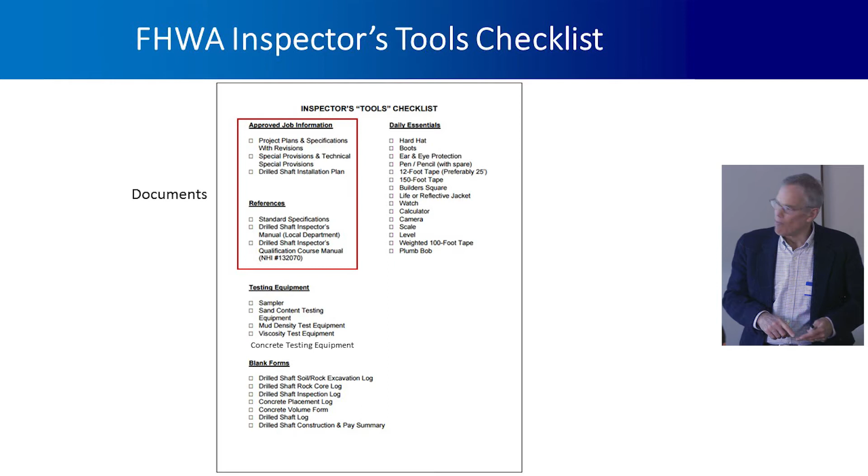So let's talk a little bit about some of those. So this would include all the information relevant to that project. So the documents, a lot that we've identified previously, right? So the specifications, the plan drawings that are relevant to the foundations, the installation plan. I think we probably already beat that horse quite a bit, but the geotechnical report, something, whether it's the plans or that report with the boring logs.

Some other things that are good to have, the notes from this class, and I think we're going to provide PDF copies of all these slides, and that could be a reference for you. Any other applicable MnDOT standard specs, like for the concrete. Any testing that is going to be done out there, for example, the concrete testing, what are the applicable ASTM or other standards.

That little green ADSC drilled shaft inspector's manual is a really handy thing to have. I've seen a copy around here. You should probably take a look at that. And then those of you that have taken that NHI course, you might share some of that information with your colleagues.

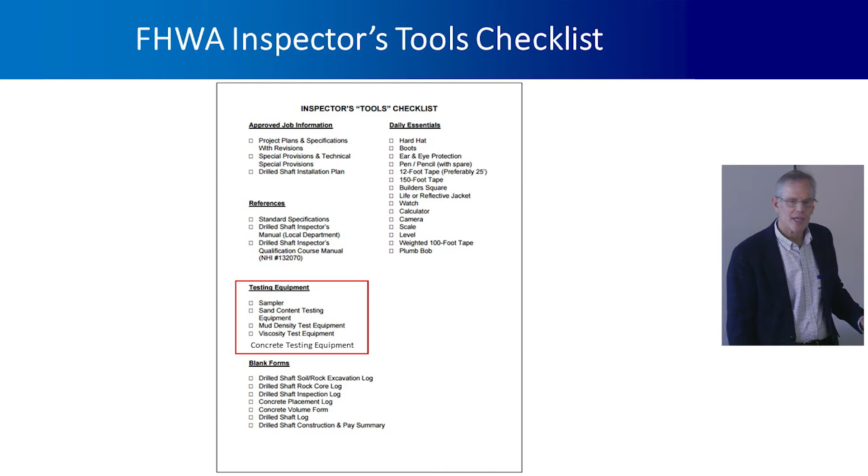And so another category here would be some of the testing equipment. And I am not clear whether the inspectors would be responsible for any of the slurry testing on this job, but from what I heard, maybe that's the contractor's responsibility. But even in that case, just as background, you probably ought to be familiar with what they're doing.

The drilling fluid, the polymer slurry, you saw earlier there's a set of specifications that go with that, and some of the properties that are important to its performance and which are governed by the specification are things like the viscosity of the fluid, and the test that you would see conducted in the field is called the Marsh funnel viscosity test. Pretty straightforward. It's not really the viscosity, it's an indicator of the viscosity. There's a funnel, and it has marks on the inside, one at the top, one at the bottom. The volume of slurry between those two marks is 1 quart.

And so the person running the test uses a stopwatch to time how long it takes for the slurry in the funnel to drop from the top mark to the lower one. That's 1 quart. And that time in seconds is what we call the Marsh funnel viscosity. So the spec for the polymer slurry might be 40 to 60 seconds or something like that. And it might be also specific to that particular product. That's something the manufacturer will specify.

And then the density or the unit weight, they just measure that on a mud balance like that. You fill a certain volume of that container right there, and then you balance it and read off in pounds per cubic foot what the density is, and that has to be within a specified range. Then the sand content test, you're basically by weight determining what percentage of sand, and anything coarser than that. There's a little sieve screen inside there that retains, I think it's the number 200 or coarser, so you can determine the percentage sand.

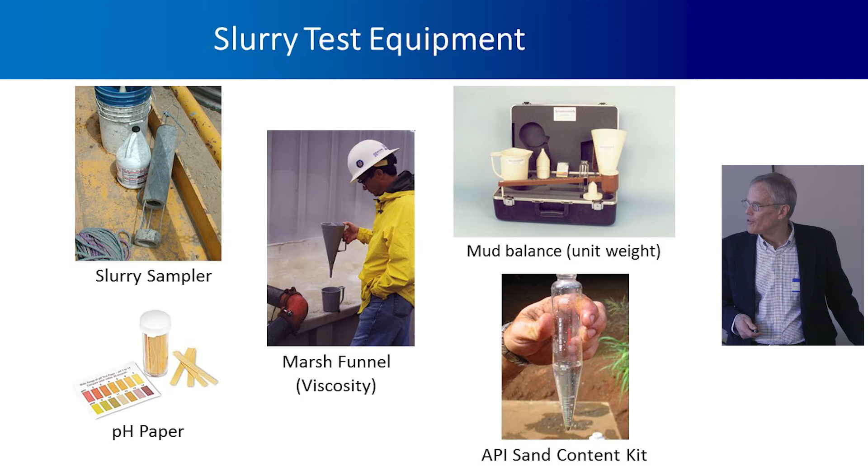And then also the pH. If that polymer slurry becomes too acidic or too basic, it's not going to perform the way that it's supposed to. So we use pH strips to do that. And then, probably a lot of you do this on a regular basis, very familiar with all the tools that you need to do slump tests and air content and so forth on the concrete.

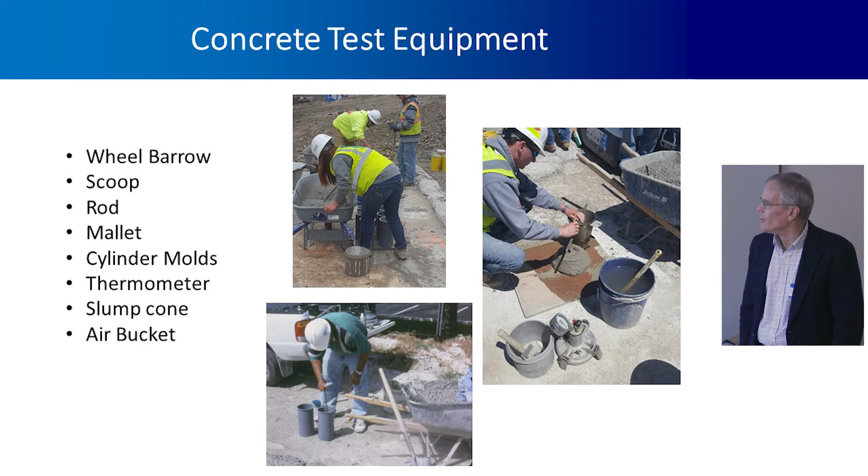Then just another category here, the forms. Any questions or comments about the forms? So it sounds like you have a standard set of forms, and Rich said there could be some improvements there, but I guess you can always do that if you want to. I think those FHWA forms are meant to be kind of generic, and you're certainly encouraged to revise those for a specific job or as you see fit.

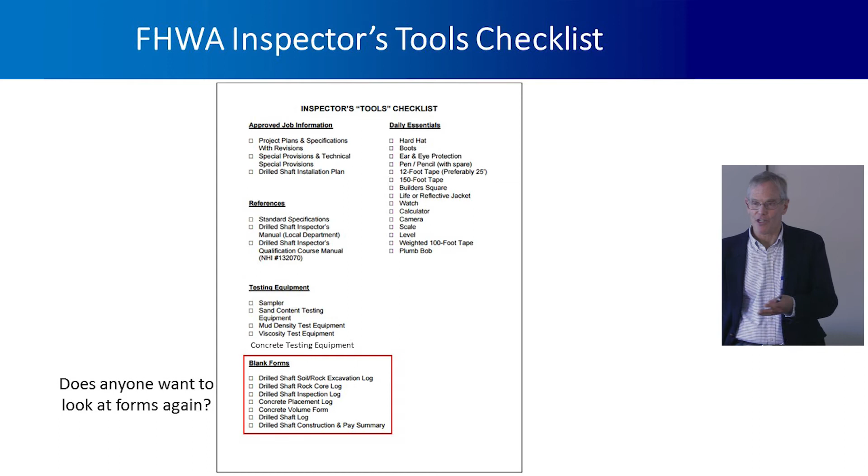And then all the stuff that you need to make measurements and for safety out on the job. So of course all your personal safety equipment, I'm sure I don't have to tell all of you guys about that. And then some of the other tools that we mentioned earlier, say a 12-foot tape for measuring tool dimensions and smaller things.

You want a weighted tape, a long one, long enough to get to the bottom of the hole. So how many people in this room have sounded the bottom of a drilled shaft with a weighted tape? Okay, so quite a few. And those of you that haven't, it's a good thing to become accustomed to, and you'll probably get the opportunity out on this job. And as you might imagine, dropping that weight off the bottom of a rock socket is going to feel quite a bit different than the base of a drilled shaft in clay, and that's going to feel different than the base of a drilled shaft in sand.

It's also really good to calibrate your feel for that by comparing how the base feels with what you get from that SID test. That SID test is telling you about how much sediment is down at the bottom, and you'll feel a difference between that thing bouncing off the bottom when it's got a bunch of sediment in it versus, even a half an inch of sediment versus an inch and a half of sediment. So it's one of those things only experience can really give you a good feel for. So a lot of things to think about here.

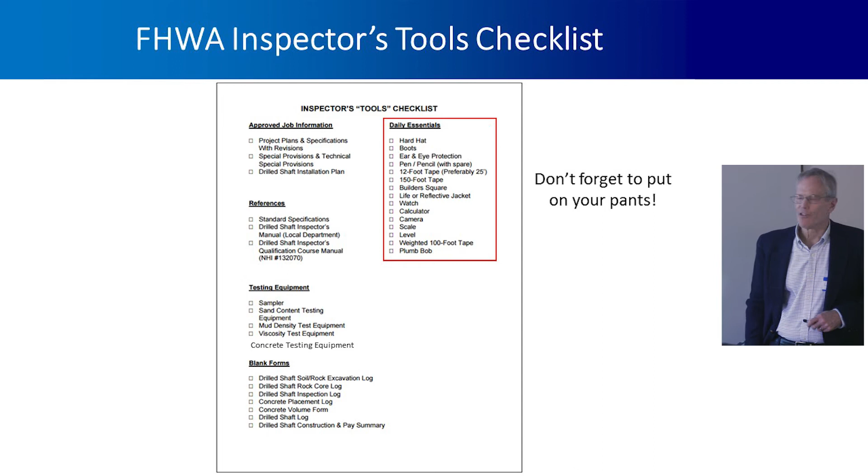So don't forget the other essential stuff. Then just a few of the real basic things you'll need out there that we just sort of outlined. So yeah, your phone with a camera on it, that's really one of your essential tools these days. Stopwatch, and monitoring, like David said, when did the tool go in the hole? When did it come out? At what depth were you at when that happened? And we'll talk a little bit more in a little bit about the other things you want to look at when they're doing that.

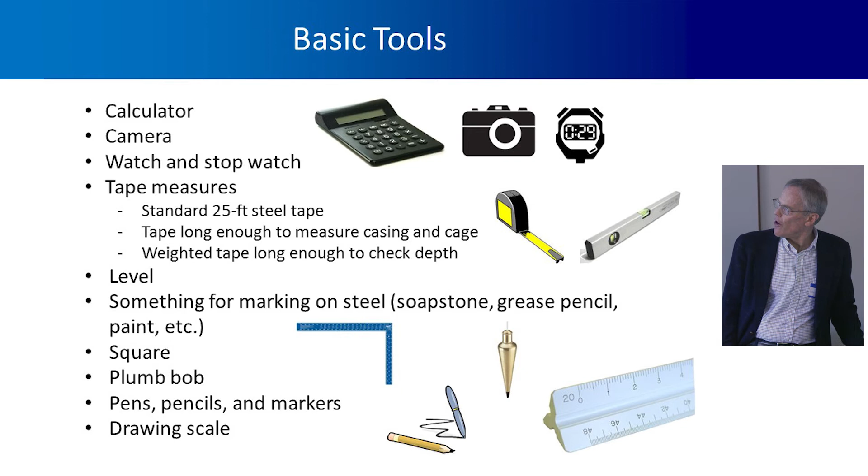Yeah, a level for measuring, monitoring the verticality of both the casing, the Kelly bar, plumb bob, rulers, pens and pencils, all the stuff that you need. And again, I'm guessing those of you that are inspectors are well versed in all this kind of stuff.

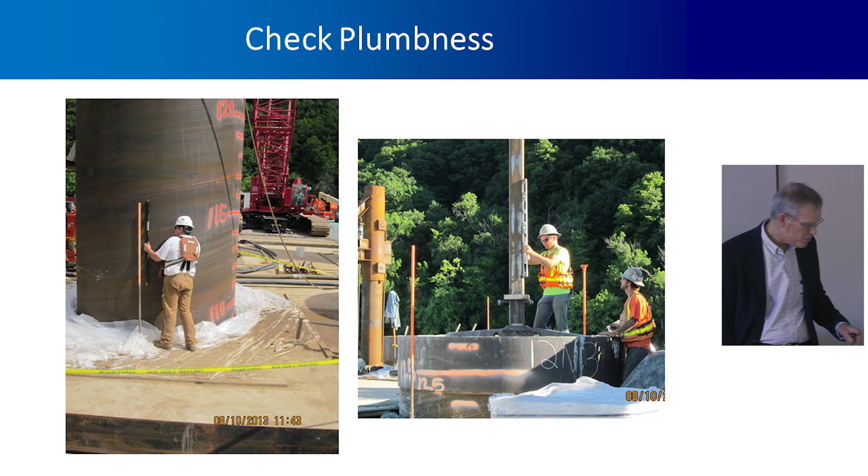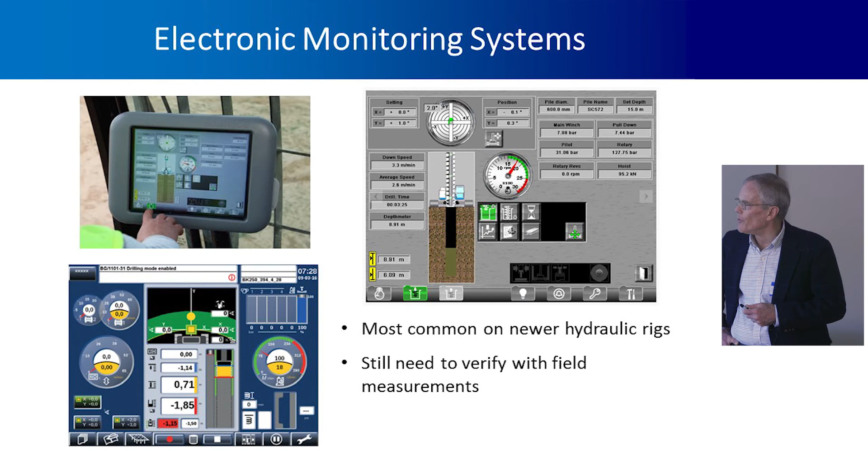And a lot of this stuff now makes a record of all those measurements for the entire duration of the drilling, and that's all basically data that could be available later on a computer. So I see a lot of this stuff on some auger cast pile rigs, sometimes more than with drilled shafts, but we're starting to see it on the drilled shaft rigs.

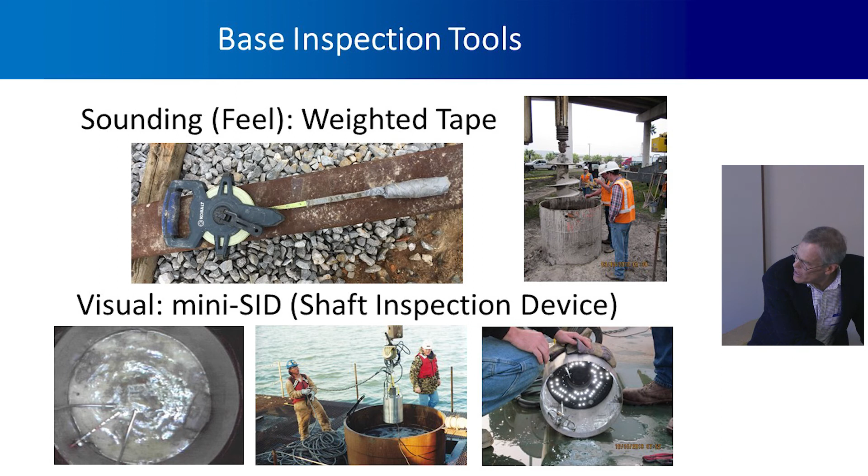So pretty useful tool. And what you would see, so the operator, and I think it might be in the subsequent slide right here. Yeah. That thing is lowered down the hole. It's got all the cables that come up the hole, and then you're looking at basically a monitor screen, usually inside this little trailer right here with all these guys looking over your shoulder.

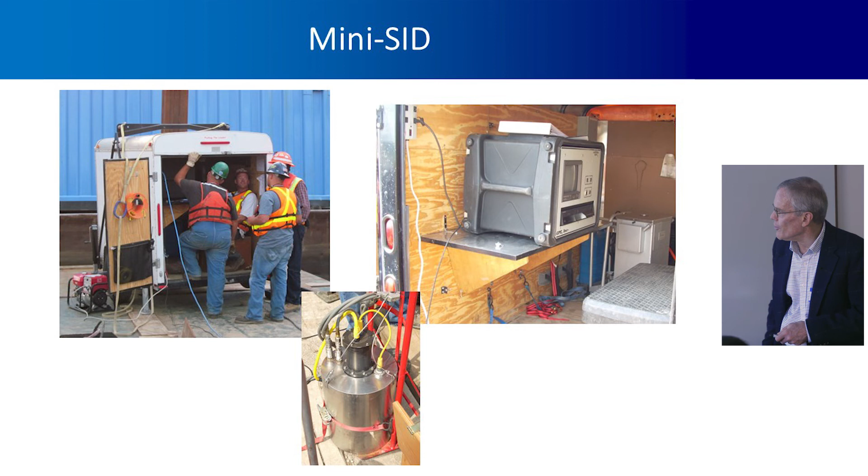So depending on how many of those pins are visible, you can make an assessment of how thick the sediment is. And the one that I'm used to seeing actually has 3 of these. You know, 3 of these plates mounted with the pins around the perimeter there. And so you can get like 3 measurements from one SID shot, okay?

And all of that is basically also recorded with the voiceover. The person making the inspection there at the monitor says, okay, this is hole number such and such, it's this time on this date, and you say how many pins are visible for each of the measurements, and recording that.

So a typical criteria, and one that we find is adequate, if you pass it, you're getting good base resistance, is that if at least 50% of the measurements made at the bottom of the shaft are less than half an inch, and no readings are more than 1.5 inches, that's a passing criteria, and that seems to work. And assuming the concrete is placed properly, you'll get good base resistance.

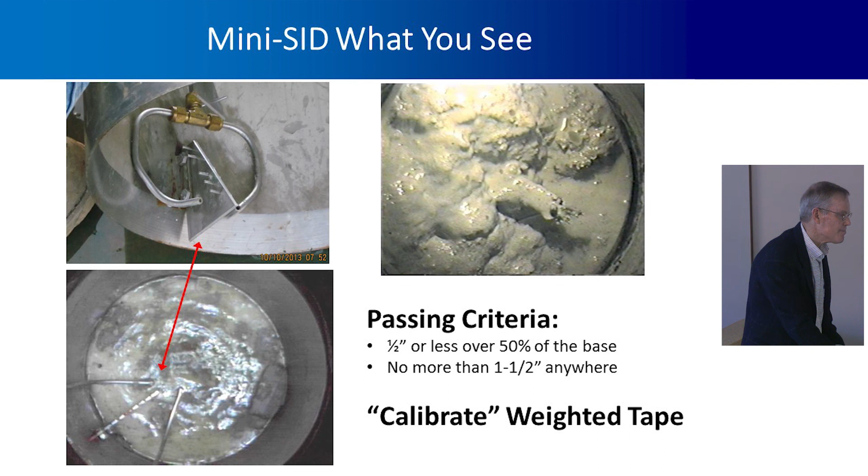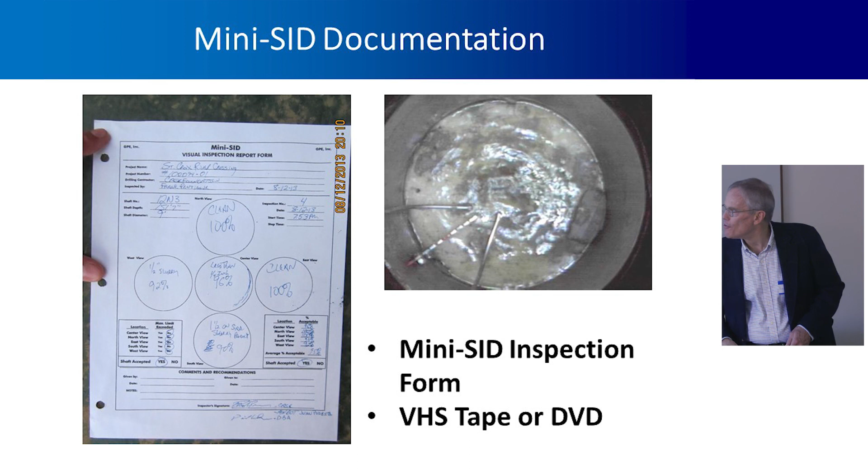And on that form, for each one of those, I'm used to seeing not this, like 100%, just how many of the 3 measurements, for example, were less than 1/2 inch, how many were less than 1.5 inch. So different ways to record that.

When they're excavating the shaft, if slurry testing is part of that, you want all that equipment. You're constantly measuring how deep they are in the excavation. You can use a weighted tape for that too. All the forms that need to be filled out, like the excavation log, etc.